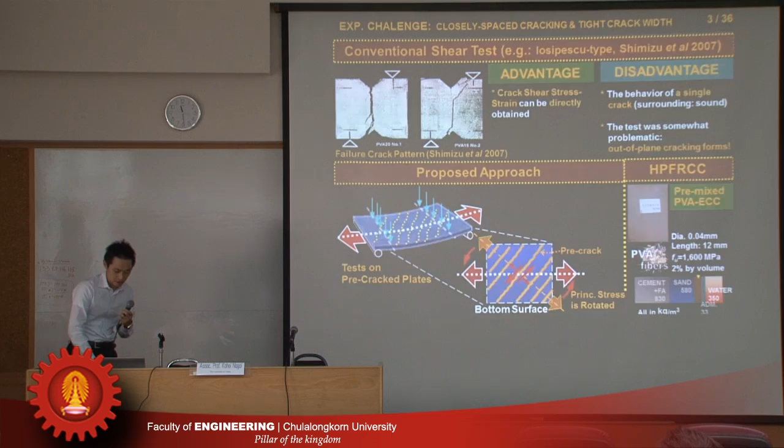For the experiment, we prepare two types of plates, very thin, 2 centimeters thickness. The size is 40 centimeters by 25 centimeters for the standard test, which we call the control plate. For the main plate, a little bit bigger, but still 2 centimeters thick, with size around 50 centimeters and so on. Anyway, it's not so big.

So to this one, we apply bending. For the control specimen, we just apply 4-point bending to check the deformation, multiple cracking, and so on. For the main plate, we firstly give bending to a certain degree of damage, then after that we unload. We have cracking on the bottom surface because of the bending.

Then we stop once, flip it, and make it flat. And then it's a unique thing: we cut to a certain degree the specimen with some damage due to the initial loading. This size is the same as the control one. Then we do the same bending test as the control one, but with initial damage at a certain angle.

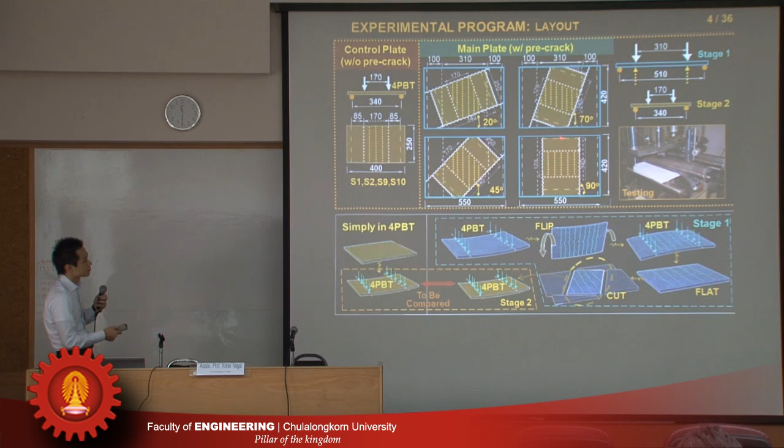So we have selected 4 types of degrees of inclination for the initial damage. First we give the initial crack, then we apply the load. That situation represents the tensile test with some damage at a certain angle, like 20 degrees, 70 degrees, 45 degrees, 90 degrees, and so on.

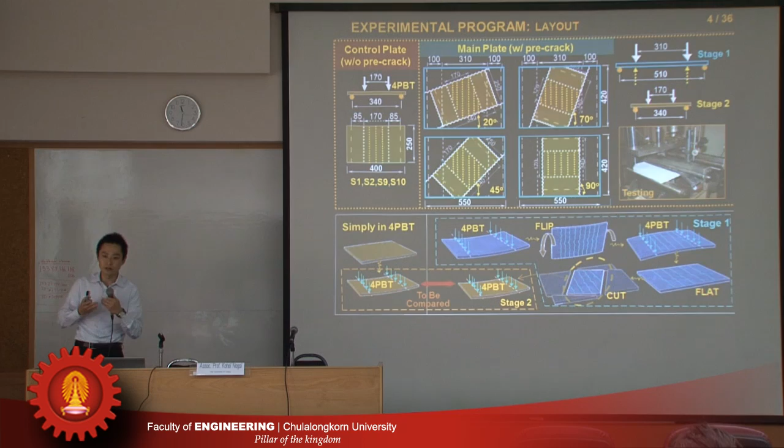Then we can check how the initial cracking slides after the cracking. So I show you the load displacement curve of the bending test of the plate with initial damage at 20 degrees cracking, initial crack, 45, 70, 90 degrees.

There are many lines on it, but this white line is the non-damaged case, and the colored lines are the results with damage. For example, when we see the 20 degrees case, we see a reduction of stiffness, from white to yellow, but we do not see so much change in the strength. Similar strength is observed.

But by increasing the angle from 20 to 45, initial stiffness decreases a little bit, and strength also decreases a little bit. At 70 degrees, the reduction is less on initial stiffness, but the strength still reduces. For 90 degrees, we have almost no reduction of stiffness, but we still have strength reduction. So due to the initial damage angle, the secondary loading result changes dramatically.

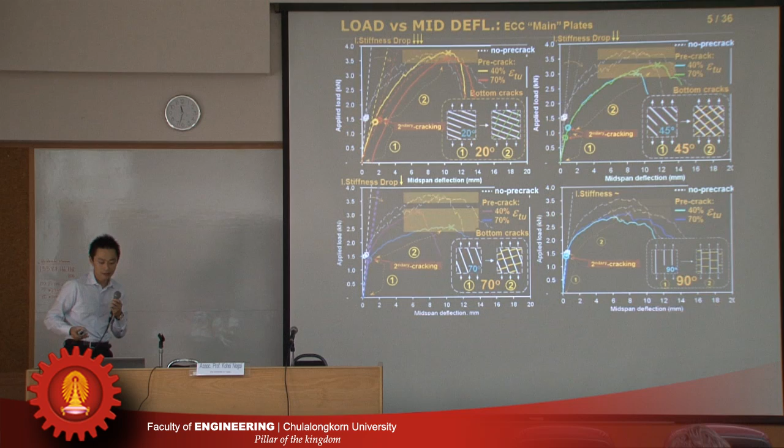This is because the initial damage may relate to the shear performance of the initial cracking. This slide summarizes the strength reduction ratio and initial stiffness reduction ratio against the pre-crack orientations.

For 20 degrees, we do not have strength reduction, but with increasing angle, we have a reduction, and for 90 degrees it's a little bit recovered. For initial stiffness, 20 degrees decreases more and then recovers like this.

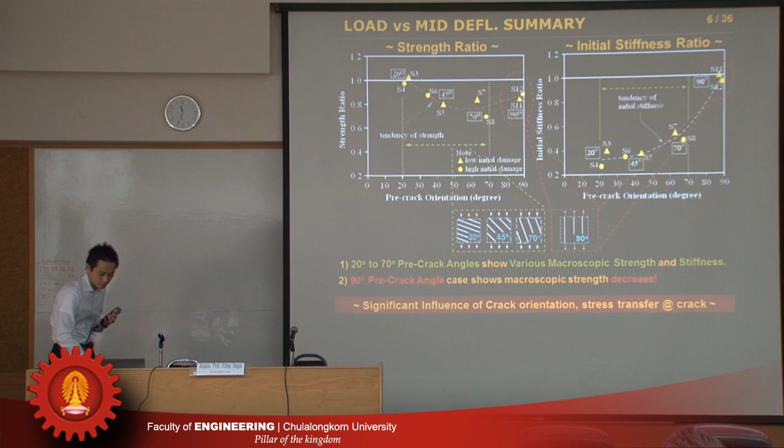So why this kind of phenomena happens can be explained by detailed investigation. Let's look at the cracking pattern.

We use some special powder and apply black light in a very dark room, so we can check the cracking after the test. This is the initial loading result on the main plate, where we just give a bending load and we have multiple cracking. This is a feature of the HPFRCC that shows good ductility.

After that, in the test, we cut the plate like this, and then apply the load again, but in a different direction. So then we will have the secondary crack like this. We can change the principal stress direction from this direction; the first one is yellow, and the second one is red.

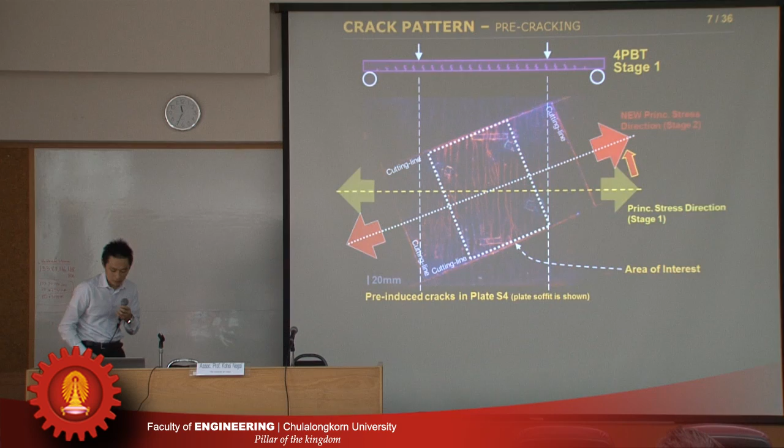So the yellow line is the pre-crack, meaning the initial loading, and this dotted yellow line shows the initial cracking direction, and the red one is the secondary principal direction, meaning first damage and second loading.

So when we follow this, we think this is just a homogeneous or isotropic material, so the secondary crack should follow perpendicular to this principal stress line. In this slide, a horizontal crack should occur. However, we see the secondary crack tend to occur perpendicular to the initial cracking direction. It does not follow the secondary principal stress direction.

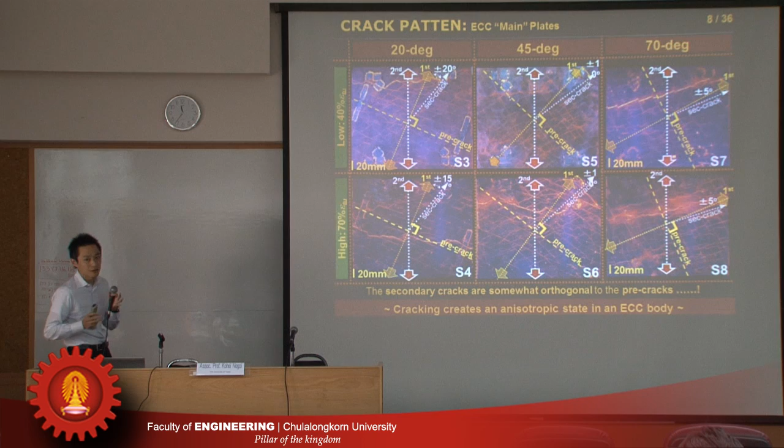For example, let's see this 45 degrees case. The initial secondary crack should go in this direction, but we do not see so much the crack in this direction, but almost normal, meaning perpendicular to the initial direction. It is because this material becomes anisotropic due to the initial damage, caused by weak shear transfer of the first cracking. The first crack slides easily, then this field becomes anisotropic, and unexpected secondary crack occurs. So this is the scenario of the secondary crack.

So by the way, when we use normal concrete with aggregate, we don't have this kind of problem. We haven't seen this phenomena in normal concrete because we have aggregate in it. When we have aggregate in concrete, even with an initial cracking, because of the good shear resistance, the secondary crack occurs following the secondary principal direction. But when we have very weak shear performance, sliding becomes very easy, so unexpected secondary crack is generated.

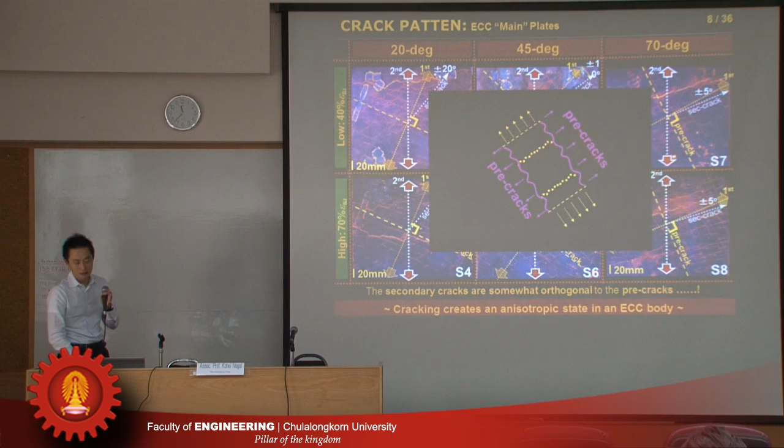This is what we found in this research. So that was the case with 20, 45, 70 degrees. In case of 20 degrees, we don't have any shear sliding because the initial crack is perpendicular to the secondary principal loading direction. But we still have a reduction of strength, about 10%. Probably it is because in the vicinity of the crack, fiber does not work well, causing about 10% reduction in strength.

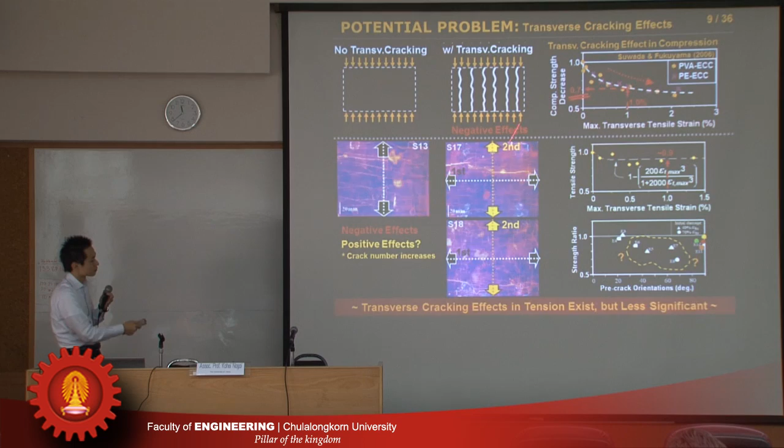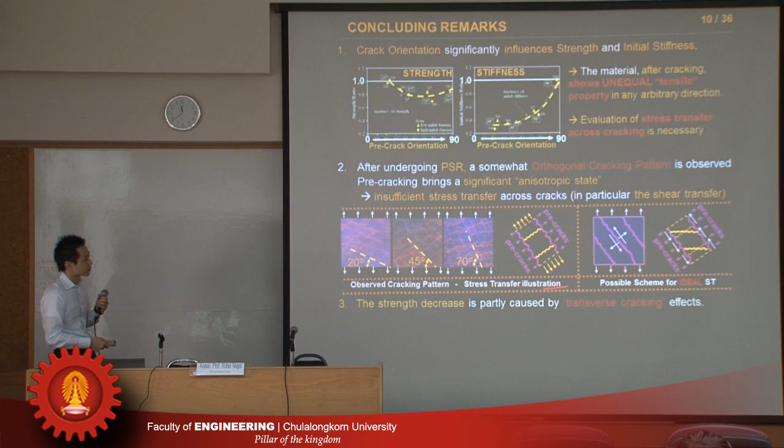Anyway, we did the test to check how it reduces. So this is a cracking pattern. As we see in this case, we have orthogonal cracking when we give a 20 degree crack. So from the plate experiment with newly proposed simple bending, we could confirm the reduction of strength due to initial damage with a certain angle, and we could summarize it. Cracking patterns were also checked.

So based on the experimental result, we tried to make a model in shear. Actually, it's not so easy, but finally we developed it, and this new model is incorporated into the normal FEM simulation program called COM3, developed by the University of Tokyo. That program is for normal reinforced concrete, not HPFRCC, but based on the normal concrete constitutive model, stress-strain relationship, we modify it for HPFRCC.

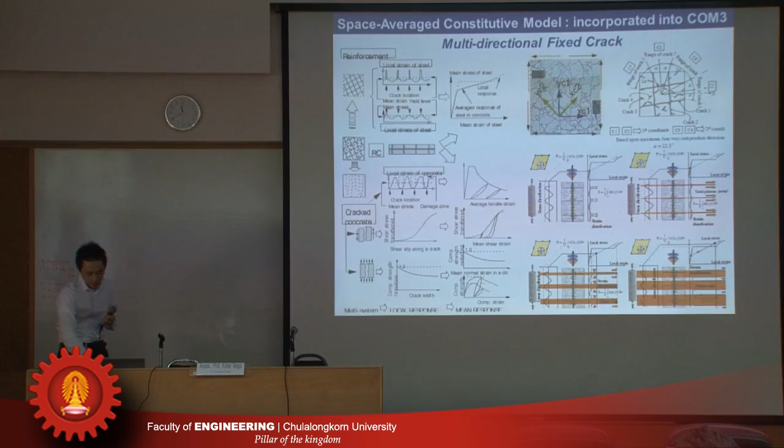This is a general view of the COM3 constitutive model. We have a constitutive model for compression, tension, and shear, and also for RC, meaning how it behaves when concrete is used with reinforcement. We adopt the multidirectional fixed cracking model, meaning all the cracks are presented in the simulation. This is a well developed model, and this program has contributed to evaluating the performance of structures. Especially in Japan, we have many earthquakes, so we need to know the capacity of the structure, seismic performance, and so on. This kind of thing can be done in this program.

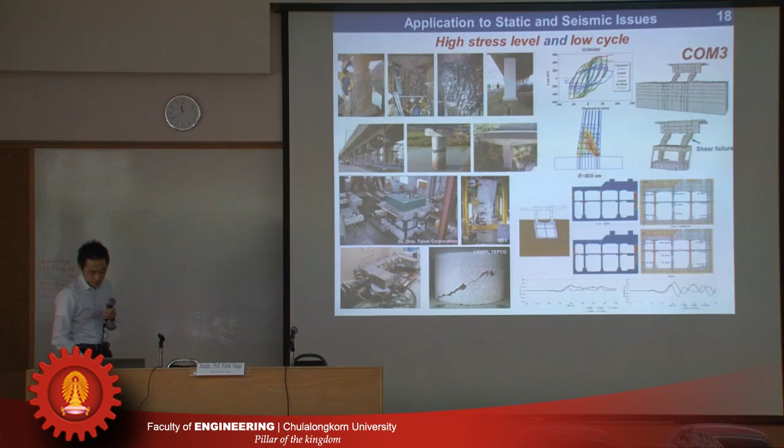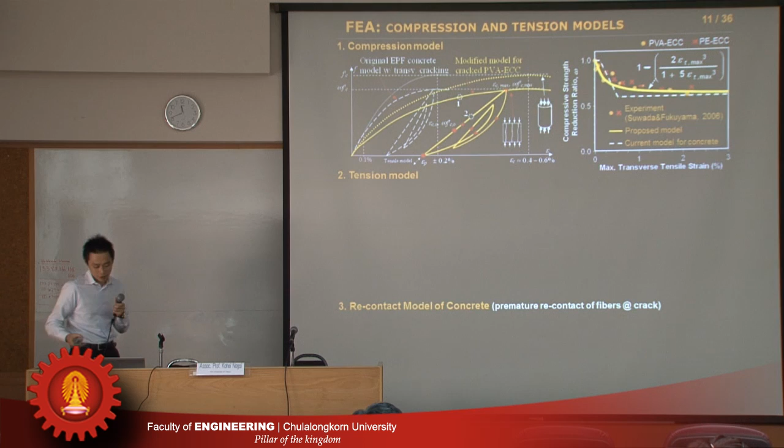So into this program, we introduce or incorporate the new model. Firstly, in compression, it's not so difficult. This is the original COM3 model, but it is known that HPFRCC or ECC used in this study shows less stiffness and a higher peak strain. So based on the experiment, we modify it, and the same unloading reloading curve is adopted. In compression, the modeling is not so complex, and we checked the model compared with the experiment, and it's okay. Also, due to lateral damage, in compression we also have some reduction of strength, so this model uses some previous research, and a similar concept is adopted.

And for tension, it's dramatically different. For normal concrete, after the peak, we have some softening curve like this, but HPFRCC shows increasing strain and stress like this.

So we adapt the trilinear line for the failure envelope like this, and we select some unloading and reloading curve. I will show in the next slide the verification of this curve. We have unloading, reloading, and also due to lateral cracking, when we have a crack orthogonal to the loading direction, we have a reduction of strength. We developed an equation to express that effect: once we have damage in the lateral direction, compression and tensile strength reduce according to the damage level, and the same applies in compression.

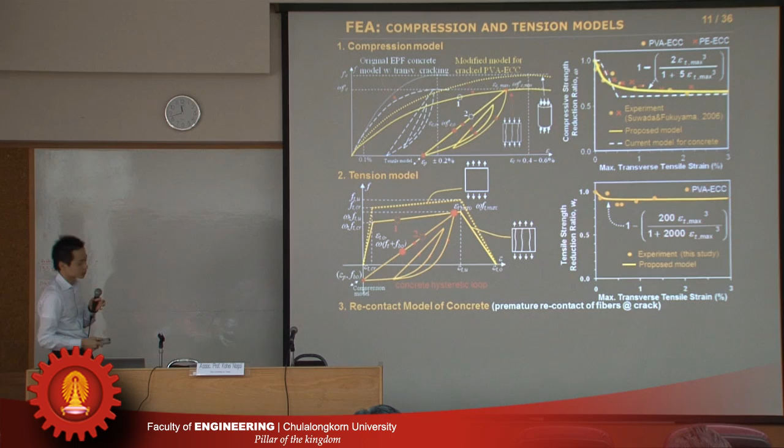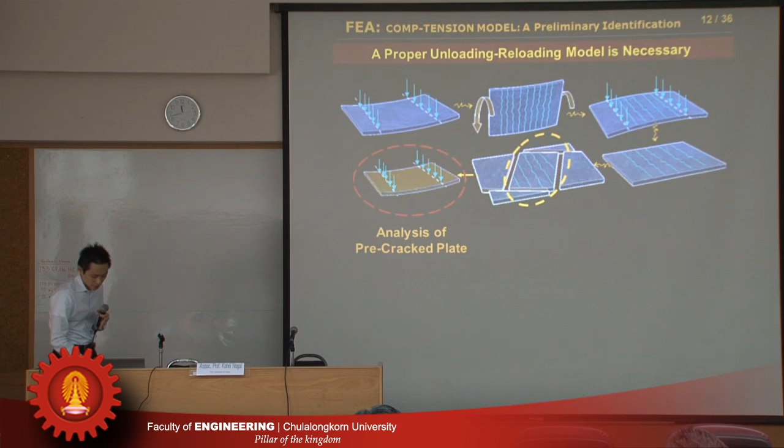Based on the compression and tension model newly proposed, we checked this model's applicability and accuracy. Firstly, we checked the internal curve, the unloading and reloading curve. To check that, we did an additional plate test with cyclic loading on the plate—applying the load, flipping, and applying from the other side, many times, to get the unloading and reloading curve of the plate.

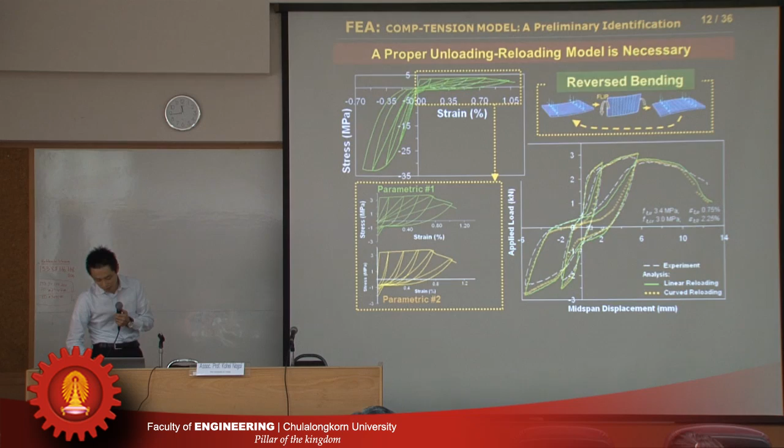After that, we move on to shear. For shear, in normal concrete we have a model where shear performance becomes 1/4 of normal concrete because of the absence of aggregate. When we have aggregate, we get good interlock, but in the case of HPFRCC, without aggregate, it's easy to slip, so shear stress is not generated as much.

Actually, this value is the same as the model for high-strength concrete. For reinforced concrete using high-strength concrete, cracks penetrate or break the aggregate as well, because the mortar part is too strong. So in the high-strength concrete case, we also use 25% of the normal value, and the same concept is adapted for HPFRCC.

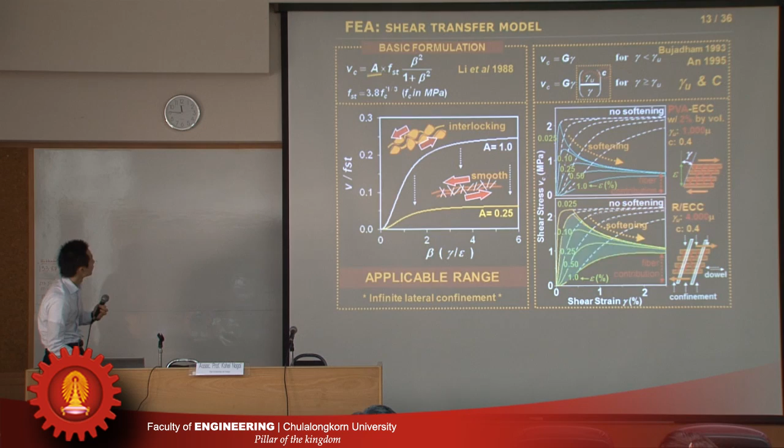A softening model is also generated, but it's a bit complicated, so I will not explain it in detail today. But anyway, I will go to the verification part with numerical simulation.

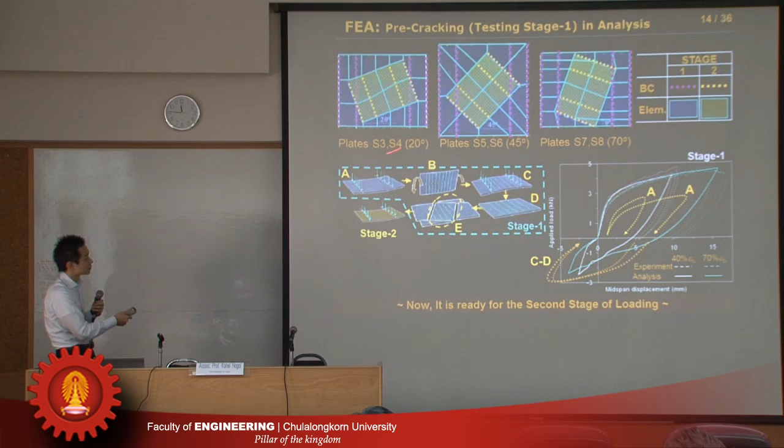Firstly, we did the analysis of the plate test. The result is just a result, so I'll quickly show you. We could simulate exactly the same loading history as the experiment, like this. This is a rotated case, but the white line is the experiment and the yellow line is the analysis—we could simulate the secondary loading as well.

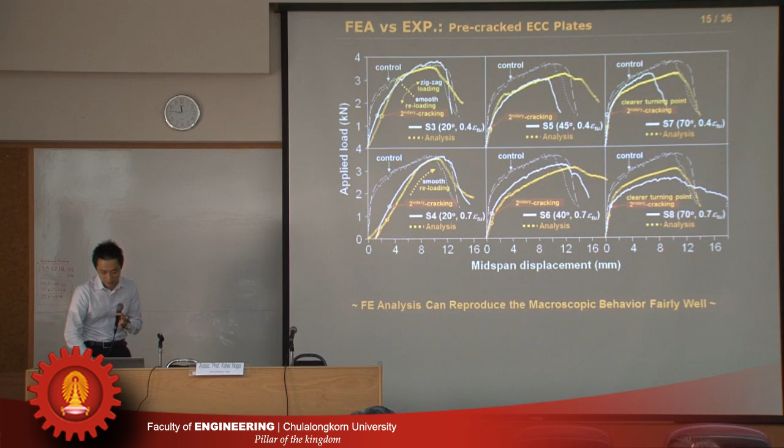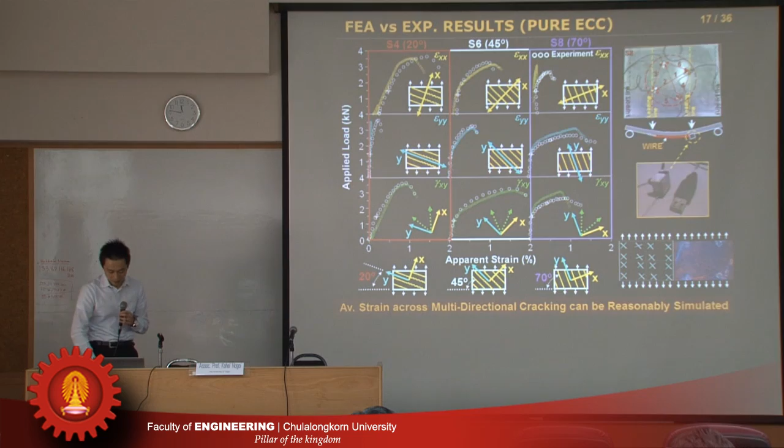Before that, we did the first loading by simulation, then we changed the loading condition in the simulation and could simulate this phenomenon. The reduction of stiffness and strength—the tendency is well represented. We could also see the behavior at the bottom part by measurement and simulation, but I'll skip that part. Anyway, white is experiment and the colored one is simulation.

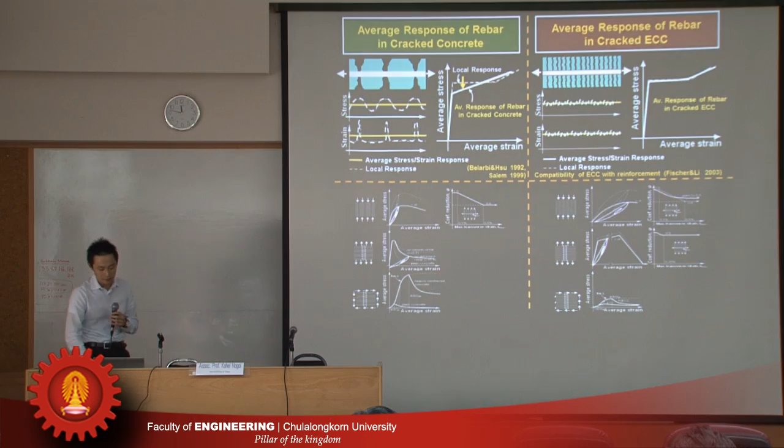That shows very well, so after that we simulate the RC panel, to confirm the behavior of RC, because our final target is to simulate the structural scale. What we did in the experiment was just material scale, but we want to extend it for the structural scale.

So we did the analysis for the test done at Toronto University in Canada, a collaborative research with Kajima Corporation Japan. They used ECC, HPFRCC, with reinforcement. Toronto University has very well managed shear panel test equipment, where reinforcement is the same in both directions, and cases with different X and Y direction reinforcement were also prepared. Totally 6 tests were done.

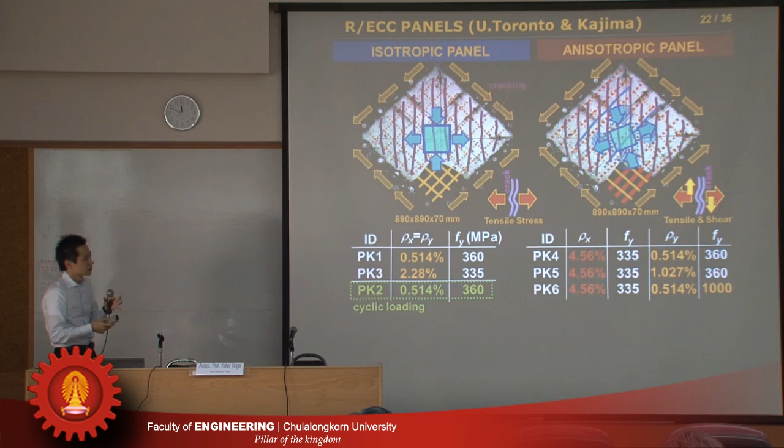This is the case with the same reinforcement ratio, and this is the case with a different reinforcement ratio. What happens with a different ratio is that after cracking, due to the different reinforcement ratio, an anisotropic phenomenon occurs. This is a very complex situation, and we tried to simulate these phenomena.

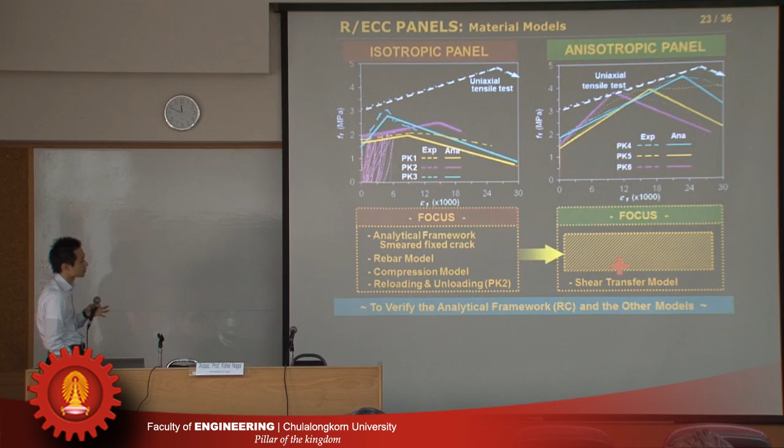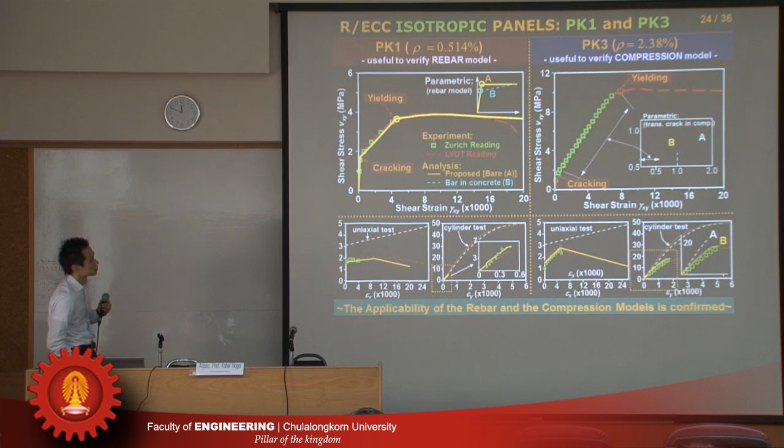So from the experiment, we extracted the tensile material property and applied it to this test. This is the case with the small reinforcement ratio—this is the experimental result, and the yellow one is the simulation result. That agrees very well. And yes, this is the case...